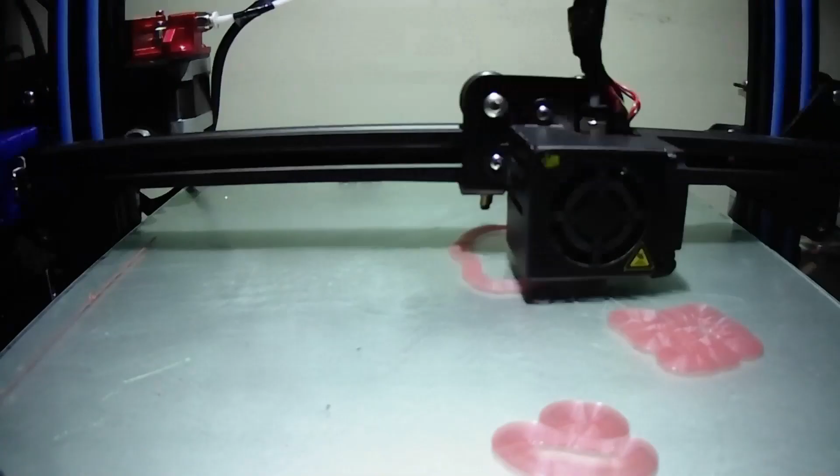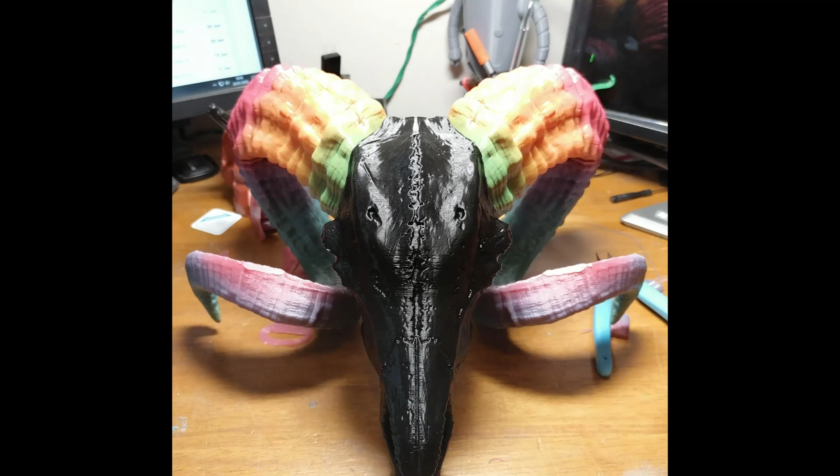Right then guys, this is going to be a really quick video just showing you some of the really useful tools and a little bit about Tinkercad. It's a fantastically easy piece of CAD software that is ideal for modifying existing STL files. So if you've got something from Thingiverse that just needs a slight tweak, a hole in one place, extra bit added on here and there, it's great for that. You can design your own stuff using Tinkercad, and you can do some amazingly complicated stuff using just the simple tools that are here.

But realistically, if you're doing something that's complicated, then you're better off with something like Fusion 360. But we're going to go down the premise that you're like me - you've printed off everything you can from Thingiverse, your house is full of loads of bits of plastic that are just sitting there because you printed them and they're cool, but you don't want to get rid of them. But now you've actually got a functional task that you need something for, and the part that you found doesn't quite fit. You've got it on Thingiverse, you've downloaded it, the screw holes are in the wrong place, or something like that. So I'm going to show you how to modify the part that you've downloaded.

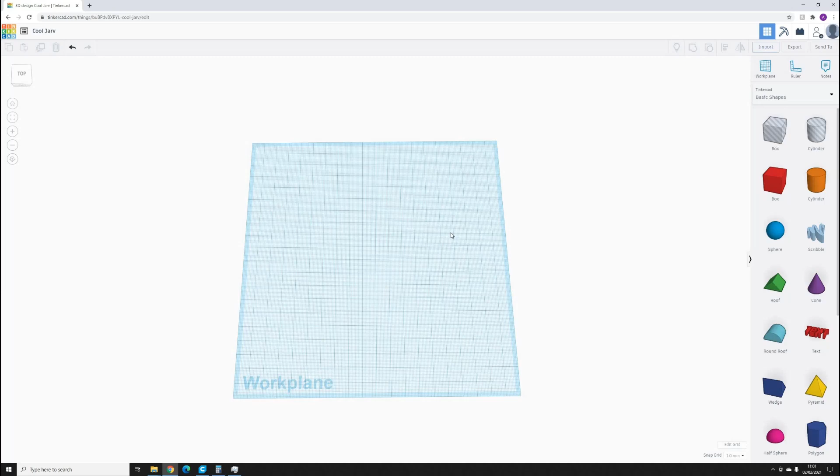So you go onto Tinkercad where we are, you click New Project, you'll get to this screen here. Click on Import, click Choose File, and select the model that you've downloaded from wherever. And there it is - this is a Stratocaster black back plate.

Now let's say we've resized it and the screw holes are in completely the wrong place and you don't need these ones here. So you need to fill these and create some new ones. Easiest way to fill them is just drag a solid shape, doesn't matter which one, from the side there.

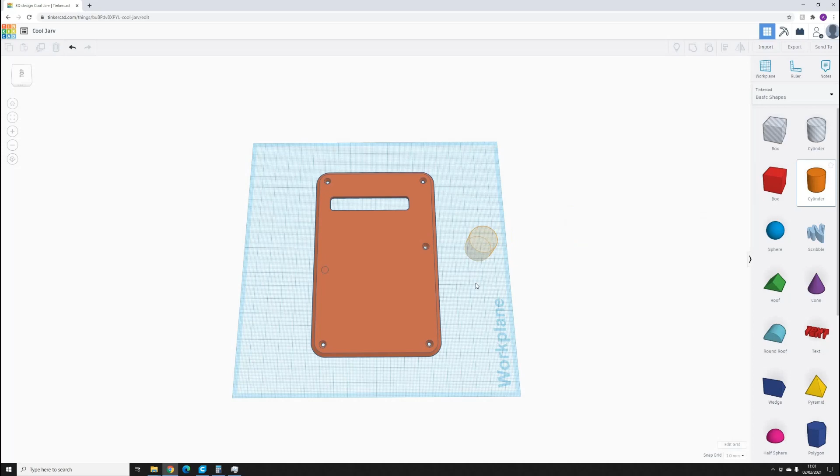Now as I'm using the cylinder, you've got a slider here which increases the amount of sides on the cylinder, which gives it a much smoother appearance. I always up that whenever I'm using that because I don't like the jaggy looks.

Now to get that hole filled, you need some information. If you click on the main model here and then click the top white box, it gives you the height. We obviously need the height to be the same, so click on your cylinder and change the height to 2.5.

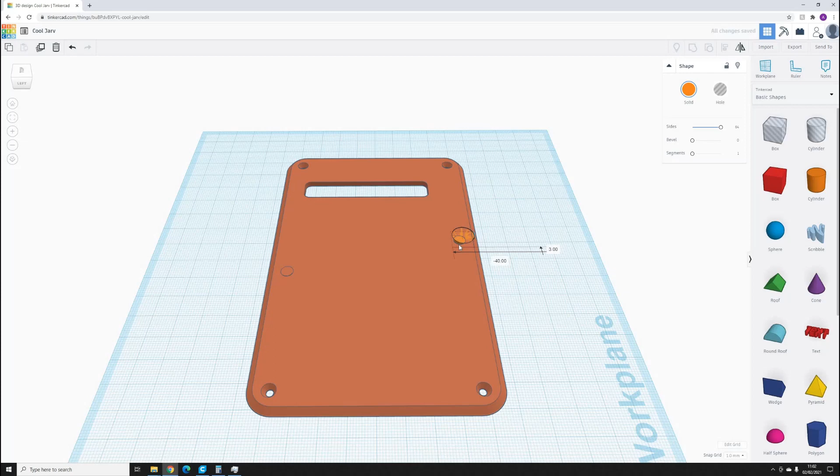Now we don't need it that big to cover such a small hole, so if you click on the corner box here and reduce that like that, then all you've got to do is drag it over so it covers the hole. It doesn't have to be exactly in the center, just so it covers the hole.

Now at the moment it's covering the hole, but it's still two separate models. You've got your main model here and then your cylinder here. You need to merge them. So this is already selected, as you can tell, because it's got the box around it. If you hold shift down and click on your other model, now both of them are selected. If you then click the group button top right, because it's now lit up, that will then merge the two, and look, bang, your hole's gone underneath, all completely gone.

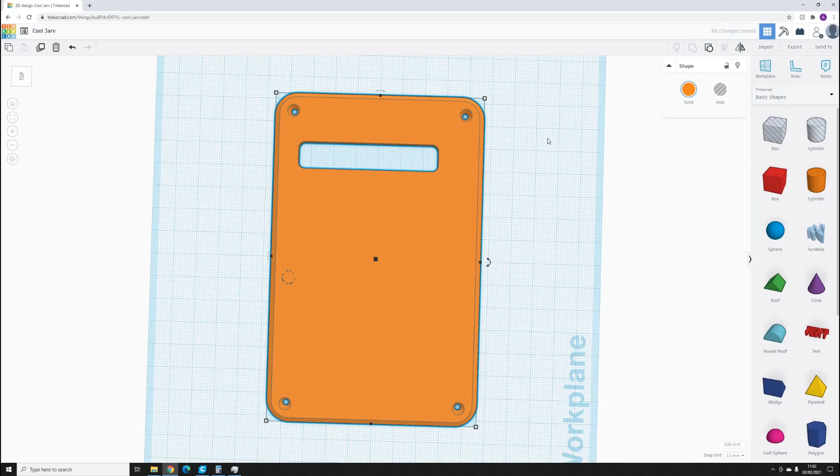Perfect. Again, you can do the same with the cylinder here. Again, I always up the sides. We know it's 2.5 there, and we click on the corner box and change that to 10.

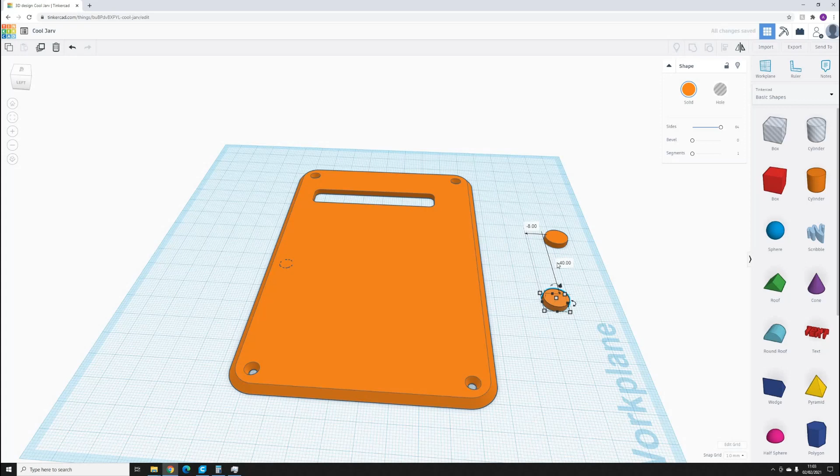Now if you're doing multiple holes that you want to fill, to save you having to drag a cylinder over and change it every time, once you've got it to how you want it, click on it and click the duplicate button up here. It will then duplicate the shape that you've just made as many times as you want, so it makes it much easier than having to keep creating the same shape over and over again.

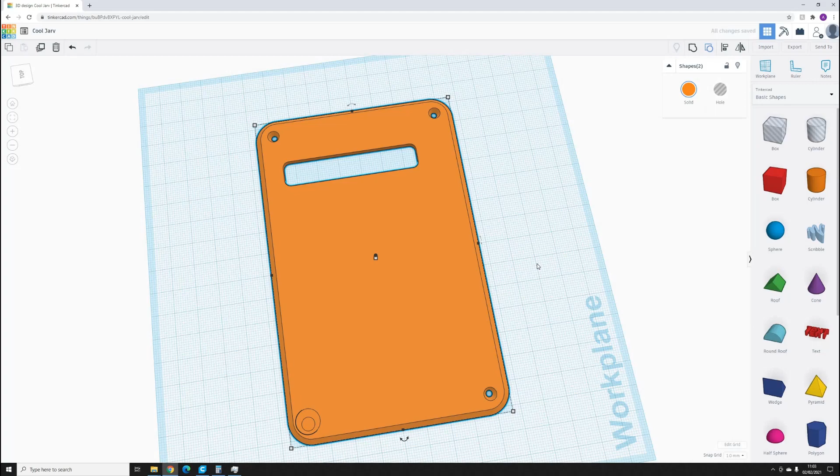So we'll drag this one to here. Doesn't have to be exactly in the center. With it selected, hold shift down, click on the model again, hit your group button, bang, your hole's gone. Again, same - drag this down here, with shift held, click on the model, hit your group button, and it's gone.

Now you need to create holes in the right place, so I'm going to make this nice and easy, saving us doing some maths. We're going to make that 100 and we're going to make that 150. So just for putting the new holes in, it makes it a bit easier to align stuff.

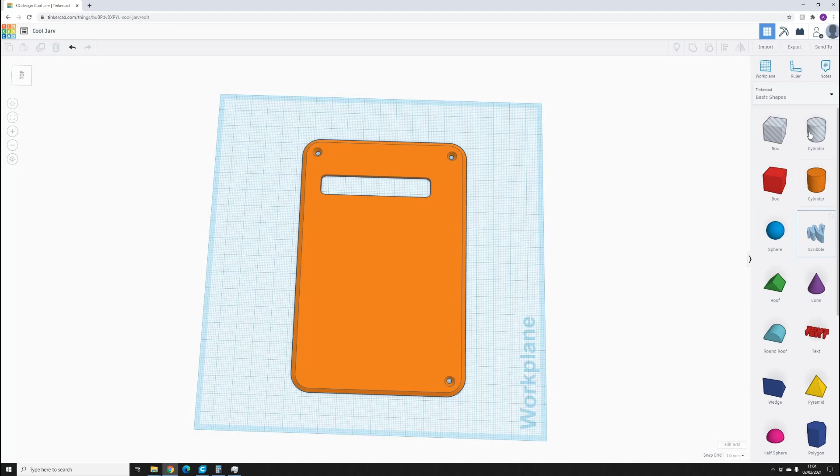Now if you want a hole that's exactly in the center, it's really easy. To create a hole, you don't have to grab - well, you can grab the solid shape because you can make them holes, but we'll start off with the ones that are already holes. The grayed out ones up here are holes. So that's your hole.

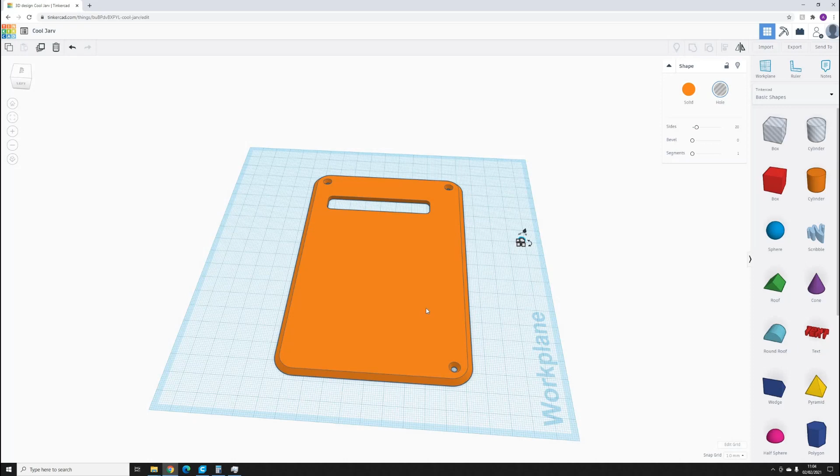Make it 3, or obviously whatever you need your dimension to be for your screw. I'm going to go with 3, and the height is 2.5. Now I want that exactly slap bang in the middle, and I can work out that half of 150 is 75, and all the rest of the stuff.

But there's a tool on Tinkercad, so if you hold shift down with it selected, select both models, and then use the align button up here. Click that, hit the center dot there and the center dot there, and that's exactly slap bang in the middle of your model, which makes it really easy.

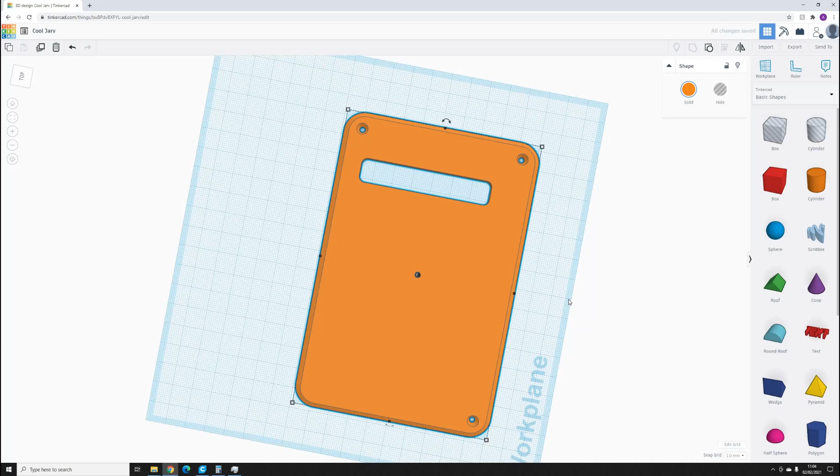So I'm going to go ahead and create a hole there by clicking the group button here. There we go, so you've got your hole for your screw, perfect. But if you look at these, they're all nicely tapered holes, so the screw will be countersunk. So obviously you want the same sort of thing.

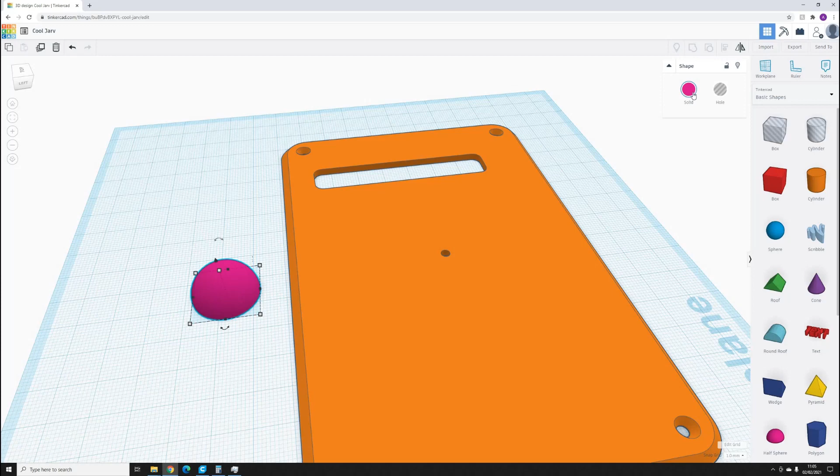Now you can do that with Tinkercad. If we grab the half sphere from down here, obviously that's a solid shape at the moment, so it wouldn't create a hole. But when you've got the shape selected, you've got your menu up here, solid and hole, so now you're going to be creating a hole.

Now obviously we need to be larger than the 3mm we created, so we'll go with 5. If you've got the screw and the specifics, you can measure the screw and you'll know exactly how big you want the countersunk hole to be. But this is an imaginary screw, so we're going from here.

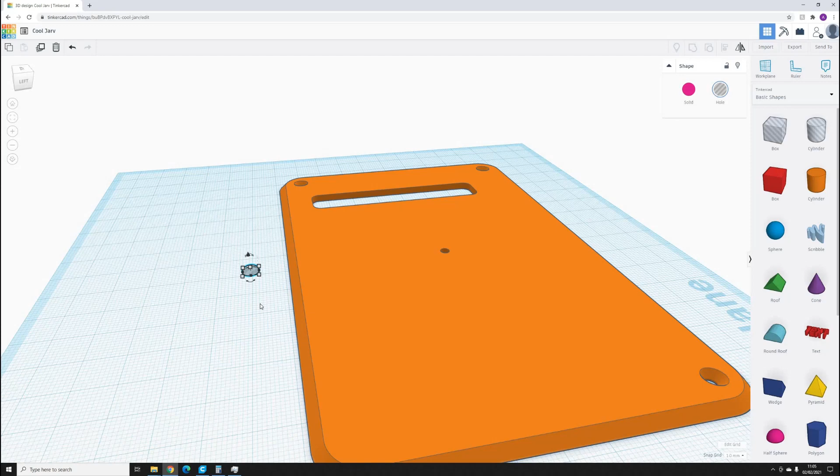That's now what I think would be perfect for that one. Obviously it's upside down, so we need to rotate it. Now you can freehand click here and drag the item round, but it's easy just to click here, click in the box and type in 180, and that will just flip it completely. So I click the arrows there in the box, 180.

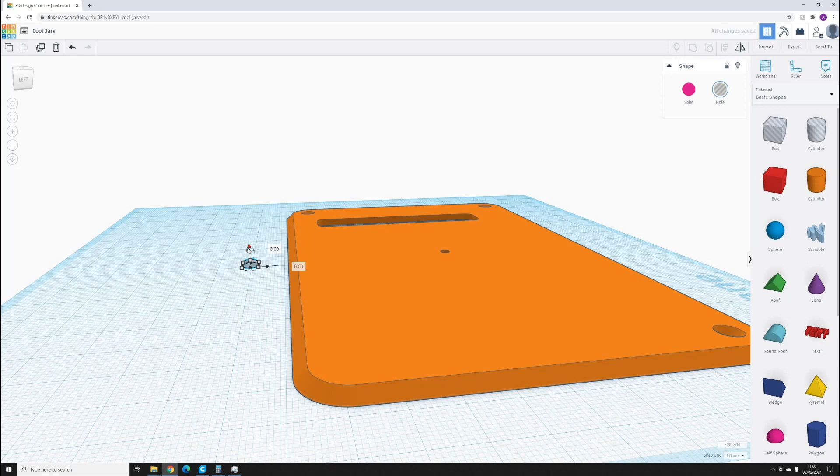Oh, get there in a minute. He says it's easier - could have probably freehanded it by now. 180, there we go, flipped it perfectly.

So if we click that, again hold shift down and select the model, click the align tool. Now we know it's in the center, so we want center there and center there. Now as you can see, we can't see it - that's because it's right on the bottom of the model down there.

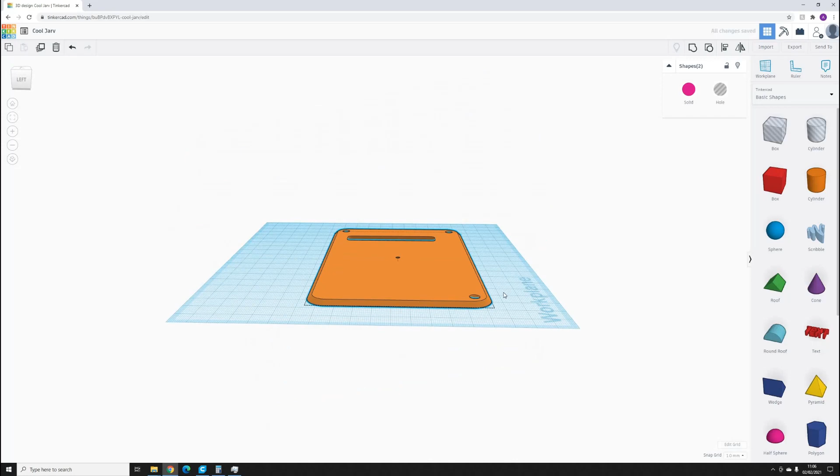If you see these 3 dots here, you've got bottom, middle and top. Well, we want it on the top, so we'll click top, and now as you can see, it's at the top. So we'll group those together, and that's giving you your perfect countersunk hole right in the middle of your model. Great.

Again, if you want to put them somewhere that's not exactly in the middle, exactly the side, exactly the top, etc., you have to freehand drag them. Now if we change that to 3mm by 3mm by 2.5, let's say...

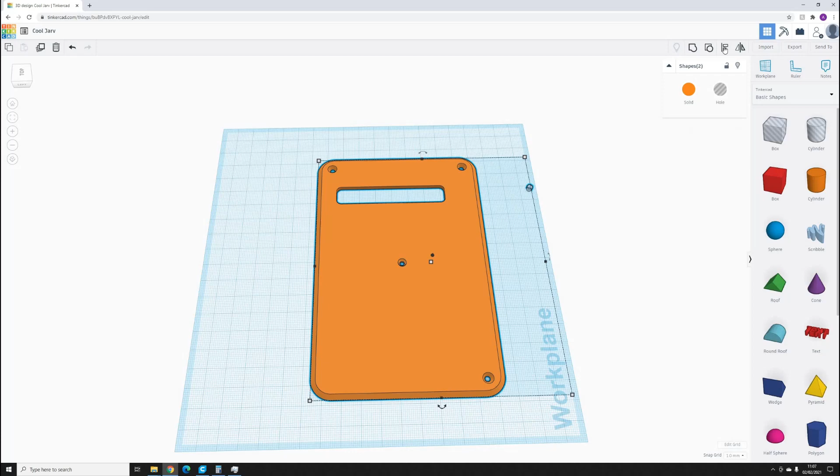That I need it here-ish, so let's just move that down to the middle. In fact, actually, I'll center it in the middle. So again, we'll align it, center it, but I'll have it at this edge here.

Now let's say I want it 30mm up from the bottom and 2mm from the side. Okay, so this is 100mm, so we obviously need that to be half of that, so it would be 48.

So we'll click here and drag it, and as you see, you've got a ruler going up. So we wanted it 30mm up and then 2mm from the side. Actually, let's do 5mm from the side, it'd probably be a bit easier. 45, and then 30. And then you've got your hole 30mm up from the bottom and 2mm from the side.

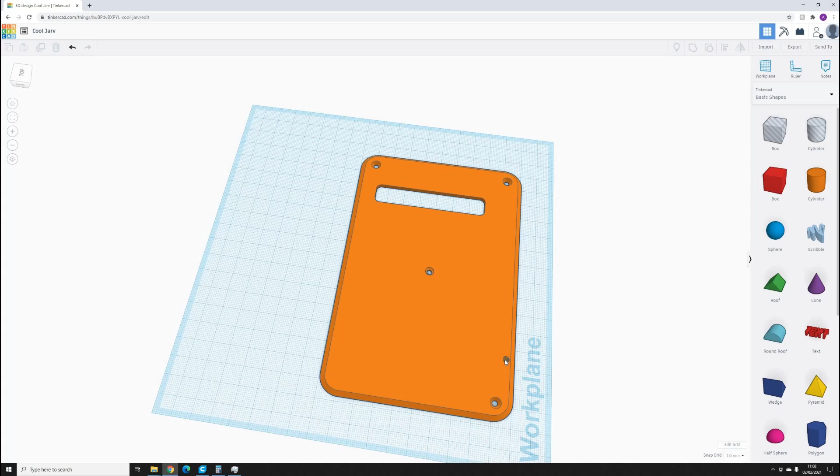And again, if you click it, just select it, and then hold shift, select the other one, group - you've got the hole exactly where you wanted it.

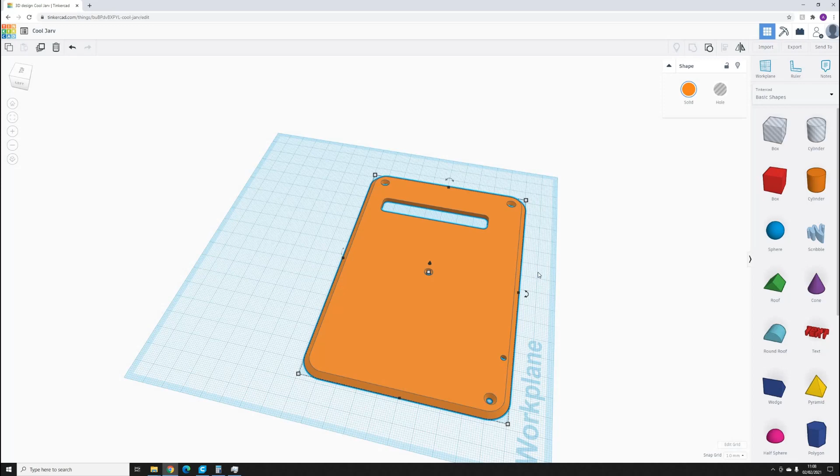So that's it, that's the basics of Tinkercad to get you up and running. There's a lot more things that you can do, but that will certainly get you the ability to use what I've shown you to add things in - just taking stuff out, putting holes in. You can add lumps on and group them together, make them whatever size you want to suit your own need.